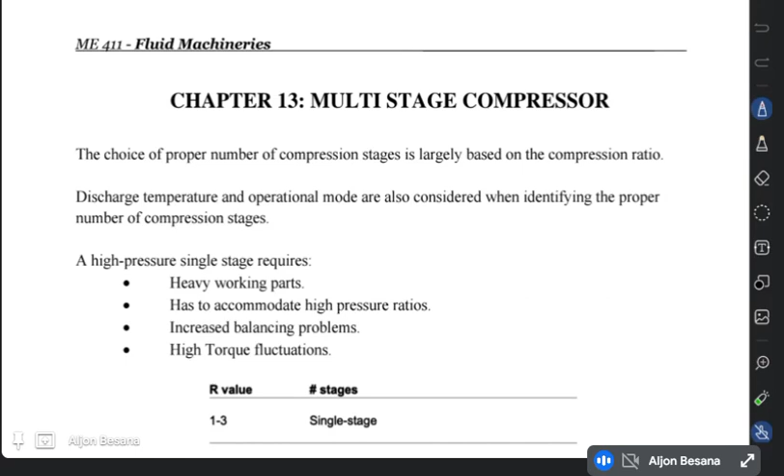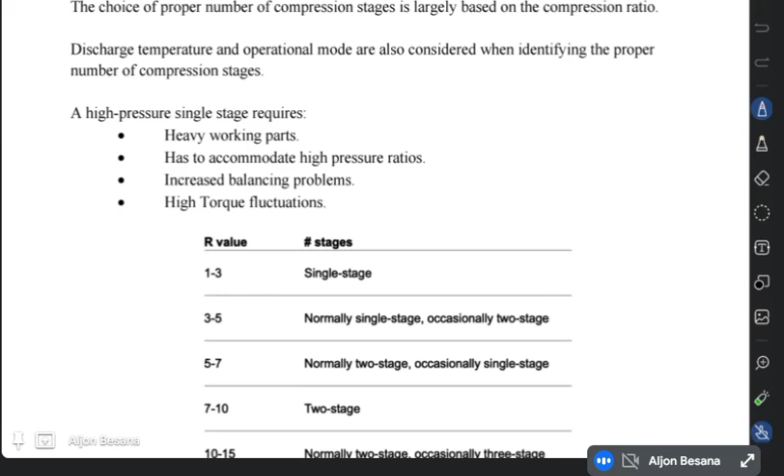Choosing the right compressor depends on what we need or how we are going to use it. The choice of proper number of compression stages is largely based on the compression ratio. Discharge temperature and operational mode are also considered when identifying the proper number of compression stages. A high pressure single stage requires heavy working parts, has to accommodate high pressure ratios, and causes increased balancing problems and high torque fluctuations.

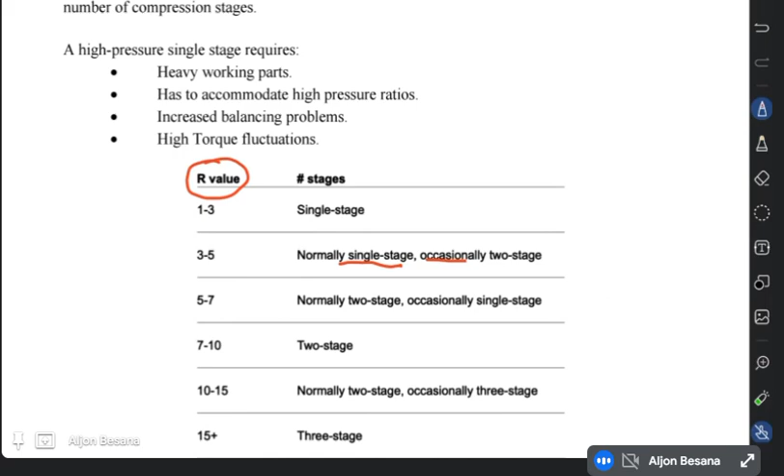This is our compression ratio, which is the value of R. When the compression ratio is 1 to 3, we could use a single stage. If it is around 3 to 5, it's still normally single stage, but we could also accommodate it with two stage. If the compression ratio is around 5 to 7, it will normally be two stage and occasionally single stage. Most of the time, that is already two stage for 5 to 7.

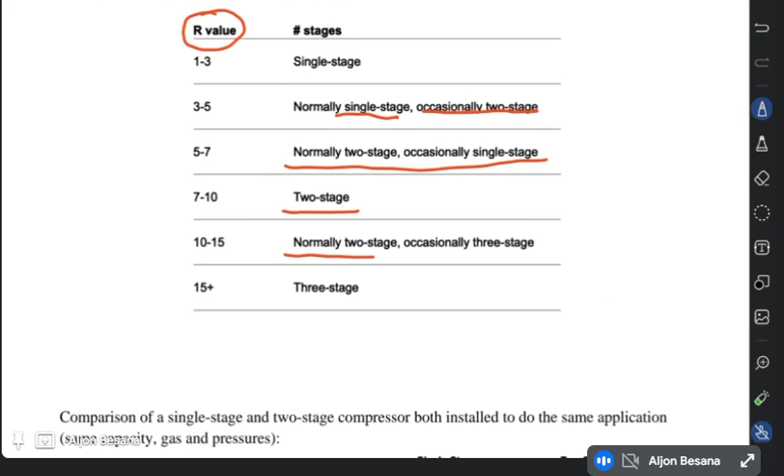We also have 7 to 10, which is already two stage compressor. For 10 to 15, it is normally two stage and sometimes it could be used with three stage. And if 15 and up, it would be three stage.

For the comparison of a single stage and two-stage compressor, both installed to the same application, same capacity, gas, and pressure, I have a video to be sent later showing the comparison between the single stage process or principle and the multi-stage principle.

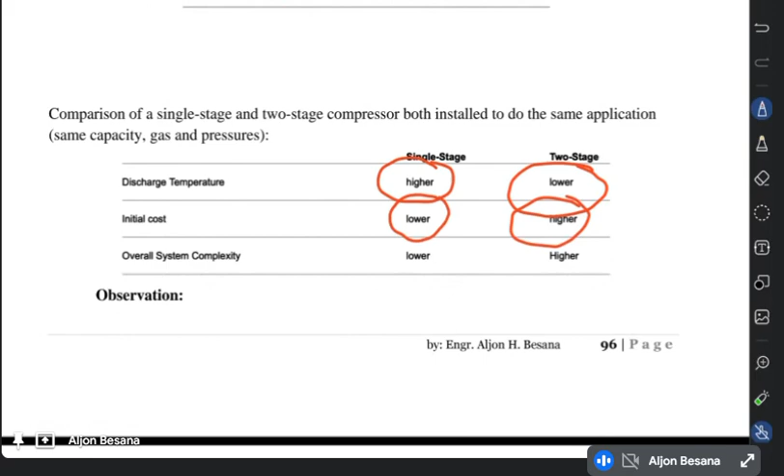For the discharge temperature, a single stage has a higher discharge temperature because as the fluid enters after a single process, it goes out. Unlike with two stage, we have a lower discharge temperature because we maximize all the possible energy we could harness before we release the gas. For the initial cost, single stage is lower and two-stage is higher because it requires more equipment. For overall system complexity, single stage is lower while two stage is higher.

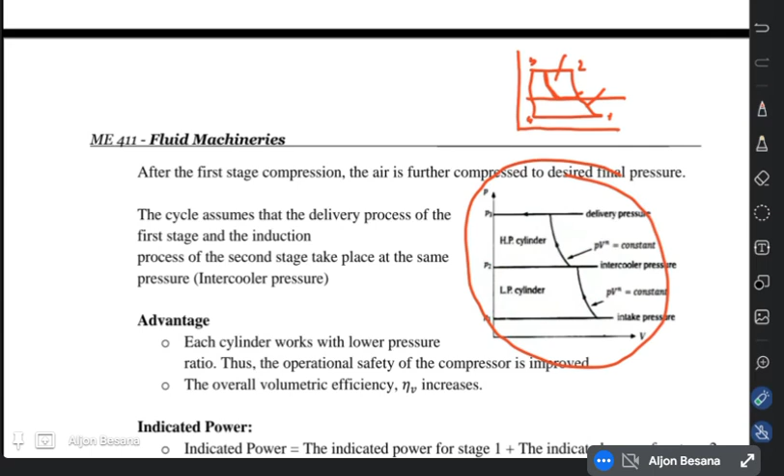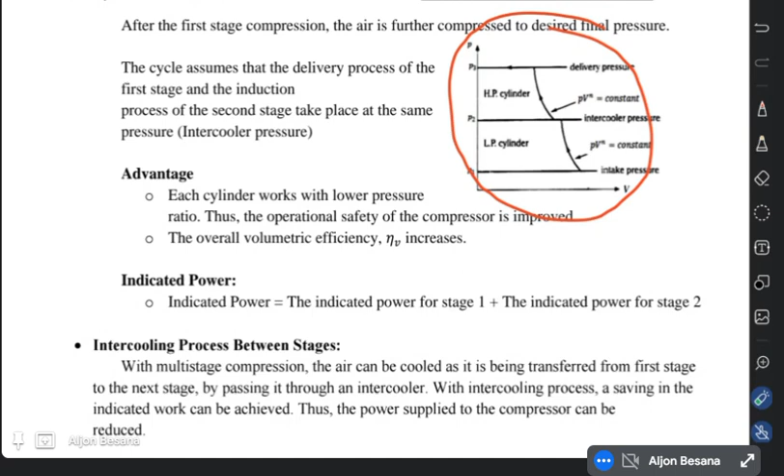So each cylinder works with a lower pressure ratio. Thus, the operational safety of the compressor is improved, because it's not forced to compress too much, making it safer in terms of safety. The overall volumetric efficiency, of course, increases.

For the indicated power of stage one and stage two, the indicated power for two stage is simply the indicated power of the first stage plus the indicated power of the second stage. So you just add the two.

For the intercooling process between the stages, with multi-stage compression, the air can be cooled as it is transferred from one stage to the next stage by passing it through the intercooler. With the intercooling process, a saving in the indicated work can be achieved, thus the power supply to the compressor can be reduced.

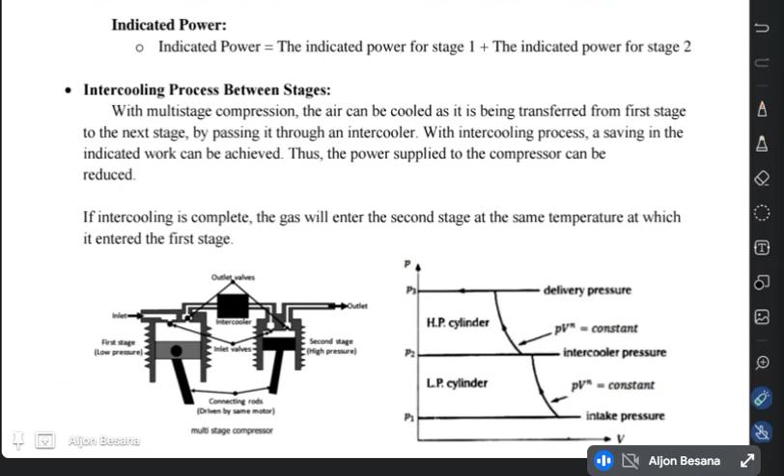If the intercooling is complete, the gas will enter the second stage at the same temperature at which it entered the first stage.

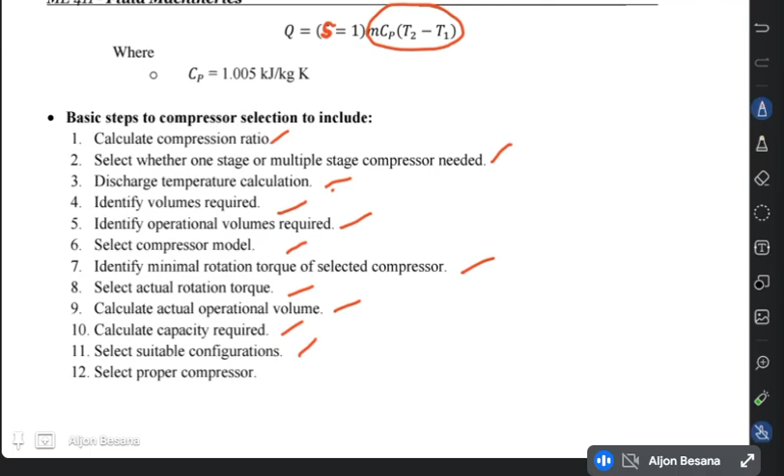For us to better appreciate this, let's try solving problem number 26 up to the last problem. A four-cylinder double-acting compressor is required to compress 30 meter cube per minute of air at 1 bar and 27 degrees Celsius to a pressure of 16 bar.

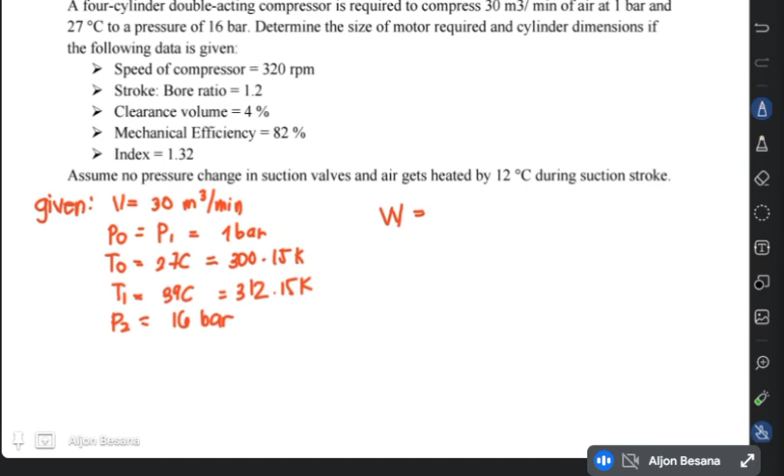Work is equal to polytropic index n minus 1, P1 V1 multiply to P2 over P1 raised to n minus 1 over n, minus 1. And this is our formula.

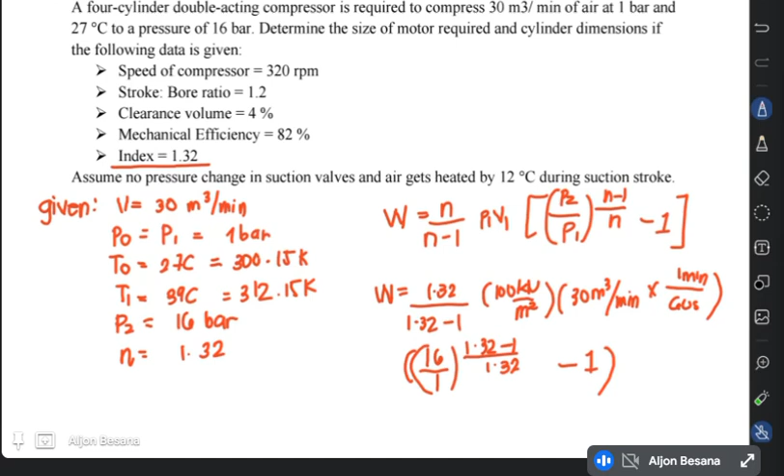So our result would be equal to, let's just calculate. Our answer is 197.6760214 kilowatts, and this is our work.

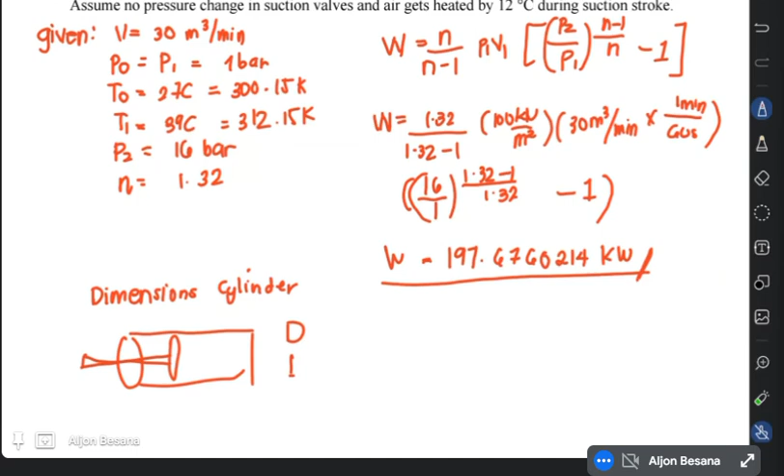So we could use this, or we could obtain D and L through our VD. Remember, our VD is LAN, where LAN is equal to L pi over 4, D squared N.

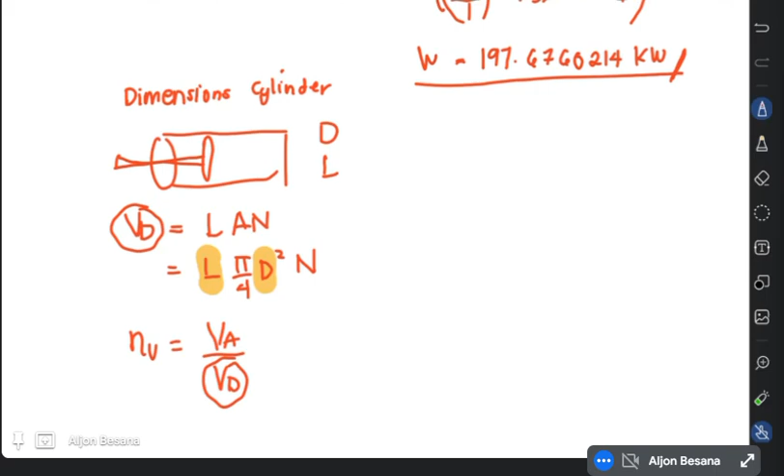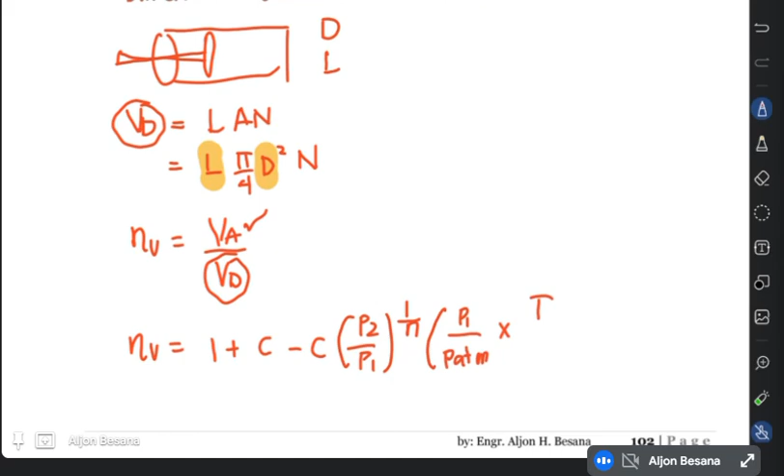NV is equal to 1 plus C minus C, P2 over P1 raised to 1 over N, times P1 over P atmosphere, times temperature atmosphere over T1.

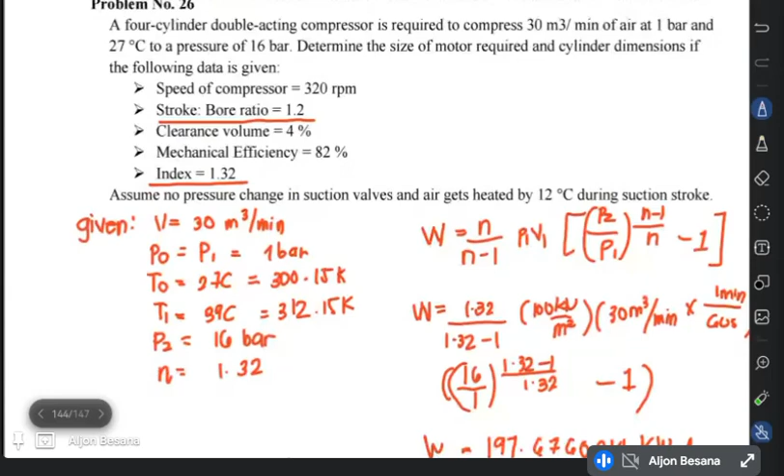To solve for our NV, para magamit natin makakuha tayo ng VD, NV is equal to 1 plus, ano ba yung clearance na binigay? May binigay na clearance na 4%. So, 1 plus

0.04 minus 0.04 times 16 all over 1 raised to 1 over 1.32, times... kahit wala na pala ito sa formula, no? Kasi parang siya ay for conversion lang. Ito agad tayong TATM, so times temperature atmospheric over T1.

Ano yung temperature atmospheric natin? Temperature atmospheric is our temperature of the air, which is 27 degrees Celsius. Dito sa atin, 27 plus 273.15... sorry, 300.15 Kelvin all over yung 312 Kelvin.

So our NV is equal to, ayan, so our answer is equal to 0.725770389, and this is our volumetric efficiency.

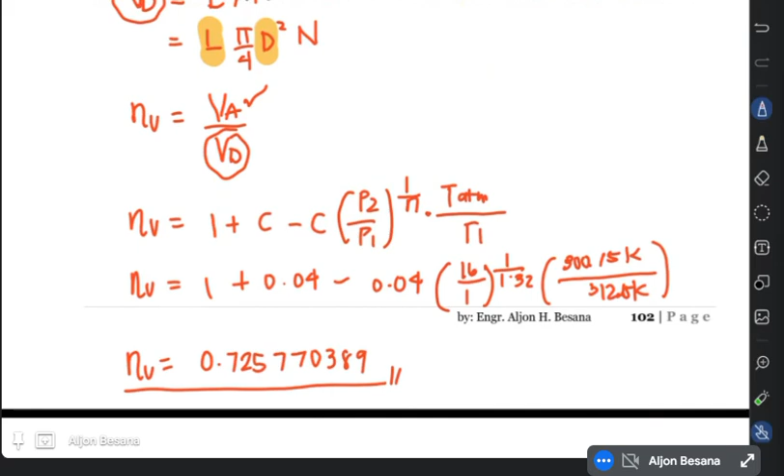0.725770389 is equal to VA over VD, na equal po kay 30 meter cube per minute over VD. So, makuha na natin si ating VD. VD is equal to 30 divided by 0.725770389.

Makakuha tayo ng ating VD na around 41.3353871 meter cube in every minute po. No? So meron na tayong VD.

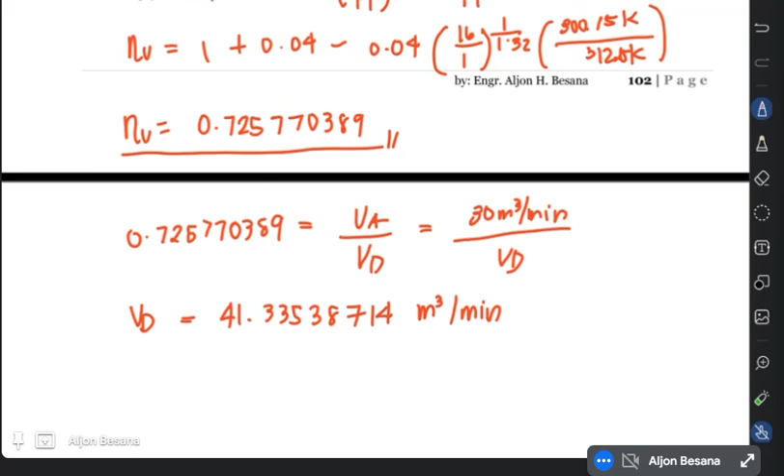Kung meron na tayong VD, pwede na natin siyang gamitin dito sa ating formulang ito para makuha natin yung D at yung ating L, no? So gamitin na natin siya sa formulang yun. So,

41.3353871 meter cube in every minute is equal to L times pi D squared all over 4, times N na 320 RPM. 320 RPM. Ang sabi sa atin, meron daw po tayo relationship ng ating stroke to bore ratio.

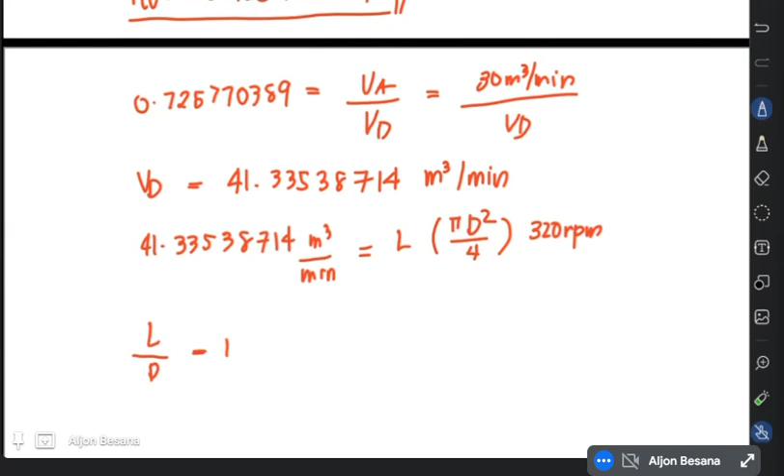No? So, stroke to bore ratio daw natin is stroke. Stroke natin is L to D ratio is equal to 1.2. So, L is equal to 1.2 bore or 1.2 ng diameter. So, substitute natin dun sa L.

So, we have equal to 1.2 D times pi D squared over 4 times 320 RPM. So, what will be the value of our diameter? So diameter will be around equal. Pero, huwag niyong kakalimutan na may binanggit din po sa ating problem.

The problem is four-cylinder, double acting compressor. So sa formula natin ng VD, we should also include that this one is four-cylinder and double acting. So we have times 4 and times 2. No? So let's solve for the value of the D.

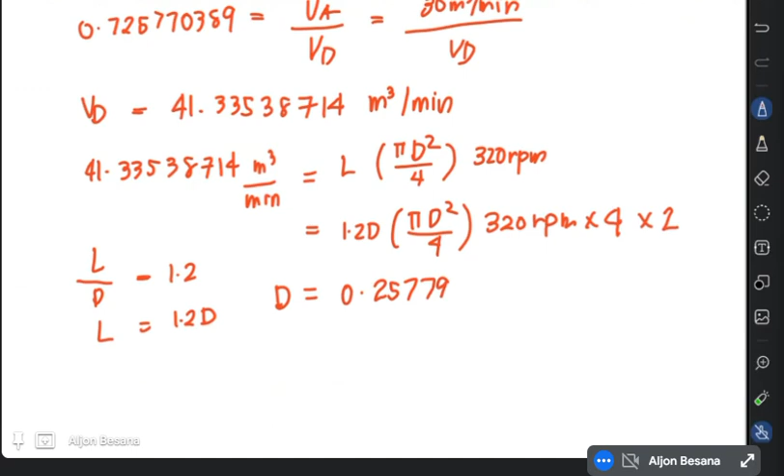So for this one, our diameter is 0.2577925163 meters po. Tapos, ang D daw po is 1.2. So ang L is 1.2 times D lang natin. Equal naman po si L sa, I'm sorry, 0.3093510195 meters po. So, we are already done.

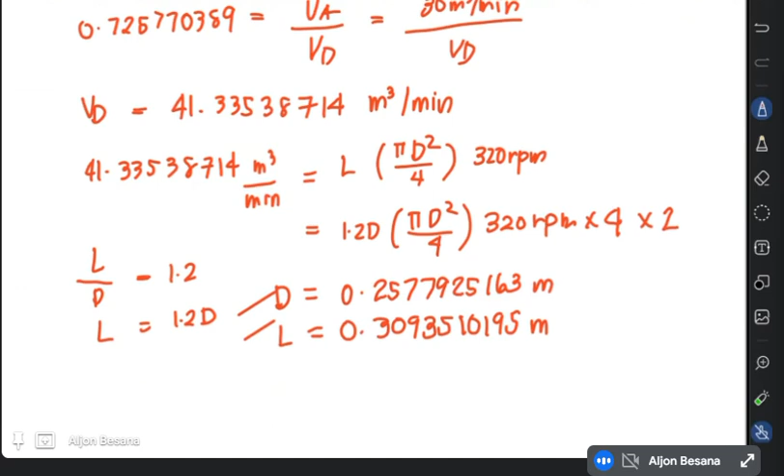Nakuha na natin ang dimension at nakuha na rin natin ang work or yung kailangang power ng ating compressor. So, let's have problem number

27. So for problem number 27, it is desired to compress 16 meter cube of air per minute from 1 bar and 294 Kelvin to 10.5 bar or simply 1.05 megapascal. So calculate the minimum power required to drive the compressor with the two-stage compression and compare it with

the power required for single-stage compression. The maximum temperature in two cases, the heat to be removed in the intercooler per minute, the amount of cooling water required per minute if the inlet and outlet temperature of the cooling water to and from the intercooler are 15 degrees Celsius and 40 degrees Celsius.

Yan, 15 lang to, 15 and 40 degrees po. Assume the value of index for compression process will be 1.35, so may N tayo. Also, assume proper intercooler pressure for minimum work and perfect intercooling. Take R is equal to 0.287, Cp is 1.0035 kilojoule per kilogram Kelvin of air.

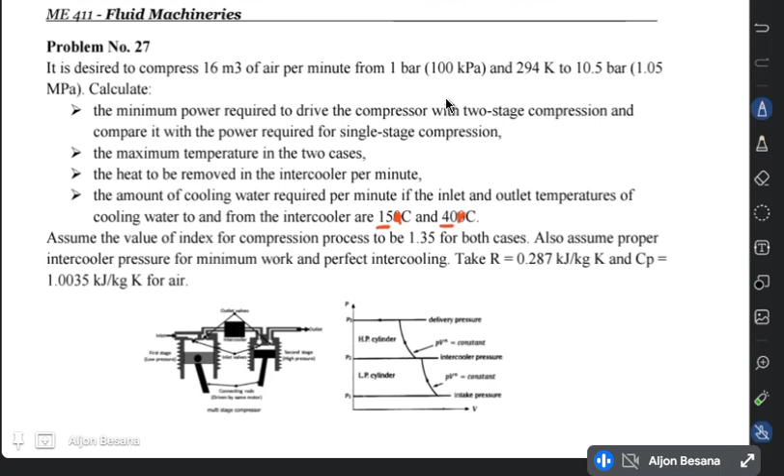So if you could see here, so yan. So ito yung ating meron tayong two-stage compressor. No, so with our two-stage compressor, ayan. So let's

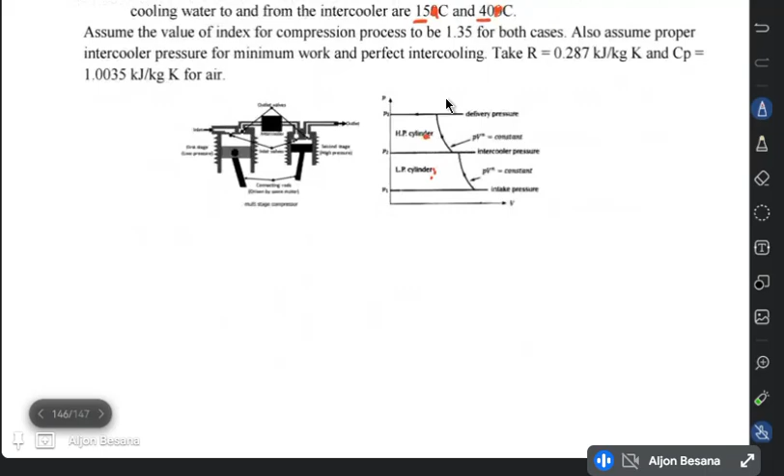ang hinahanap sa atin ay ano una? The minimum power. Doon muna tayo sa given pala, sorry. So let's sub the given.

So P1 is equal to 1 bar. T1 is equal to 294 Kelvin with our polytropic index N equal to 1.35. Our V1 equal to 16 meter cube per minute.

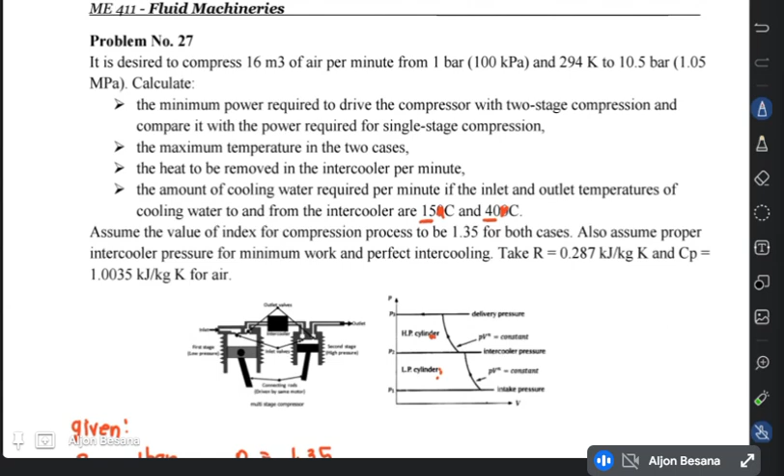So sa ating problem, yung P3 natin desired ay 16 meter... desired to compress 1 bar to 10.5 bar. So yung ating P3 is equal to 10.5 bar. Bakit po P3 final? Pwede ring PF. No, kasi P1, P2, P3, tatlo. No, pwede ring PF.

Then we have our R na equals 0.287 kilojoule per kilogram Kelvin. Our CP naman equal sa 1.0035 kilojoule per kilogram Kelvin of air. So meron po tayong temperature inlet na 15 degrees Celsius at T outlet po na 40 degrees Celsius.

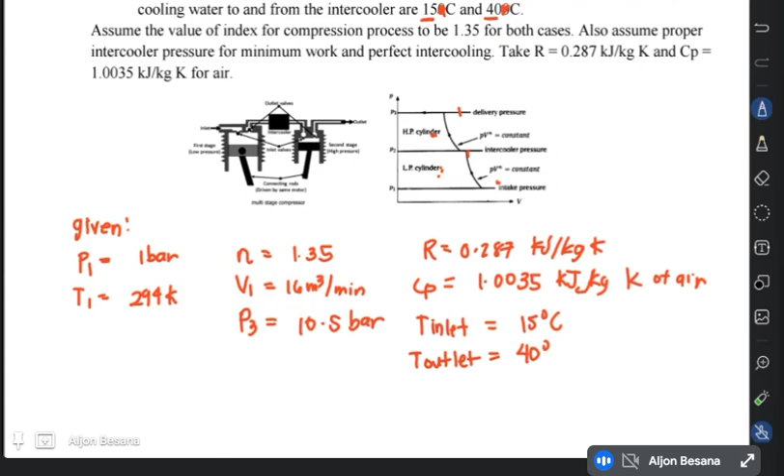Okay, so let's first have for us two-stage compressor. Dahil two-stage, stage 1 is stage 2, so this is two-stage po. So for this two-stage, ang formula natin, general formula na lang tayo para hindi tayo nalilito. So for this two-stage, work is equal to S n over n minus 1, P1 V1 raised to Px over P1 raised to n minus 1 over S n minus 1. Where, kapag two-stage, magiging yung S natin ay magiging 2. Yan, that is for the two-stage compressor.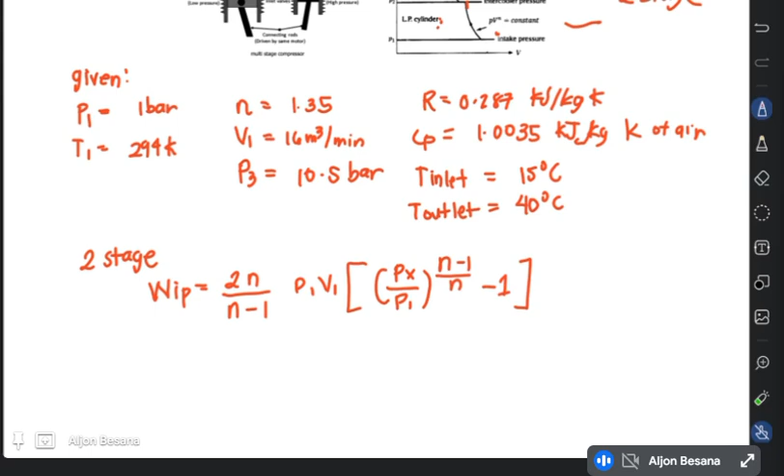So let's try to solve. Given naman tayo na lahat ng pangangailangan natin. So 2 times 1.35 all over 1.35 minus 1 times our 100 kilonewton in every meter squared, with our velocity, volume flow rate, which is times 16 meter cube in every minute, given din to. Convert lang natin in every minute ay 60 seconds, times yung px natin. Binigay po ba ang px natin? So si px natin ay wala pa.

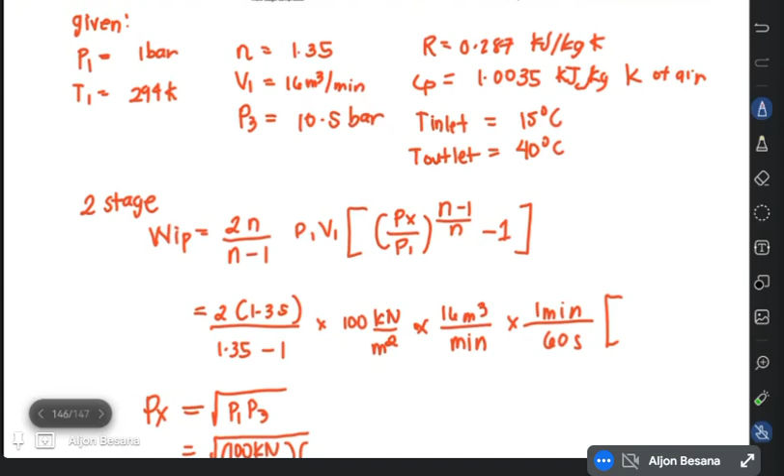So let's try solving our px. Paano po ba ang formula ng px pag two-stage? Px is equal to square root ng P1, P3. So square root po ng ano ang P1 natin? P1 is equal to 100 kilonewton times P3 is 10.5 bar, which 10.5 bar is equal to ilang megapascal yun? 1.05 megapascal. So this will be around, in terms na agad tayo ng bar para madali, 3.241 bar.

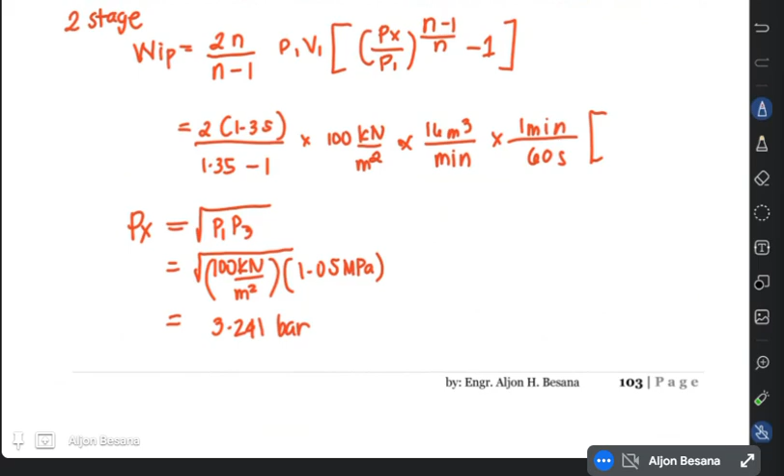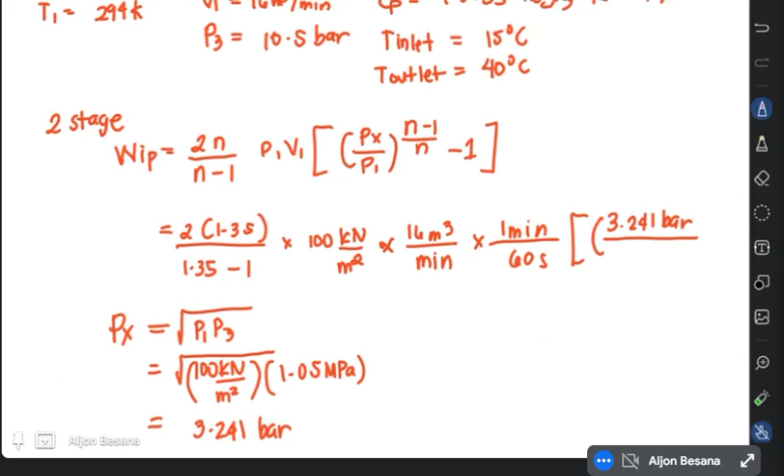No, so you may try to compute, same naman. So we will now be having 3.241 bar all over yung ating P1 na 100 kilonewton are also equal to 1 bar. Kaya bar ang ginamit ko para madali yung cancellation dito, madali sa calcu. Raised to 1.35 minus 1 over 1.35, may minus 1 pa dito. Okay, so our WIP is equal to, so this will be equal to 73.32330881 kilowatts, ay, watts. So meron na tayong work input.

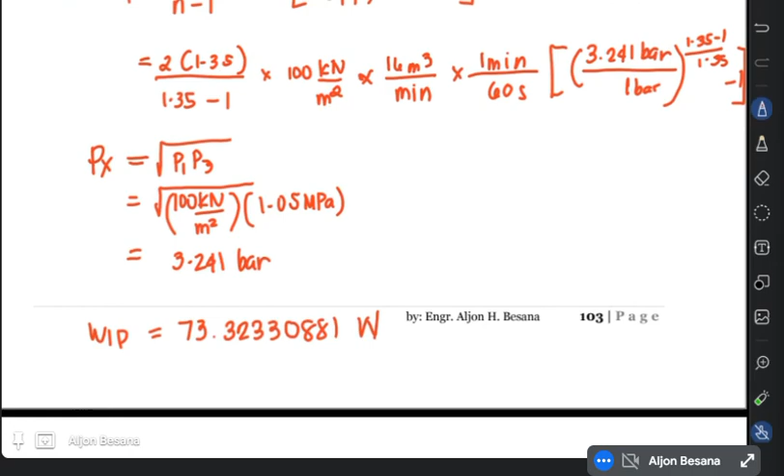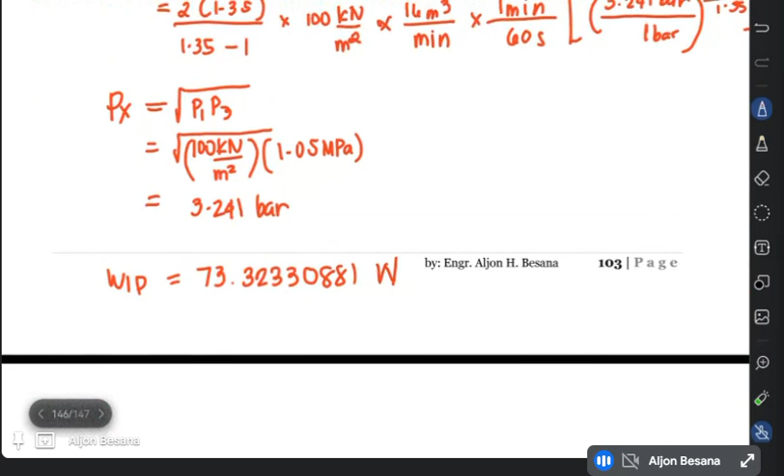Sunod, ano bang hinahanap sa ating sunod? Minimum power required, done. Maximum temperature. So maximum temperature natin, pag maximum temperature, then that is T3. So T3 is equal to, naalala niyo yung formula, nakalagay na dun kanina sa atin, N minus 1 all over N. So this will be T3 is equal to, anong T1 natin? T1 is equal to 294 Kelvin. P3 is equal to 1.05, 10.5 bars, while Px is 3.241 bar raised to 1.35 minus 1 over 1.35. Our T3 is equal to 398.7510543 Kelvin po.

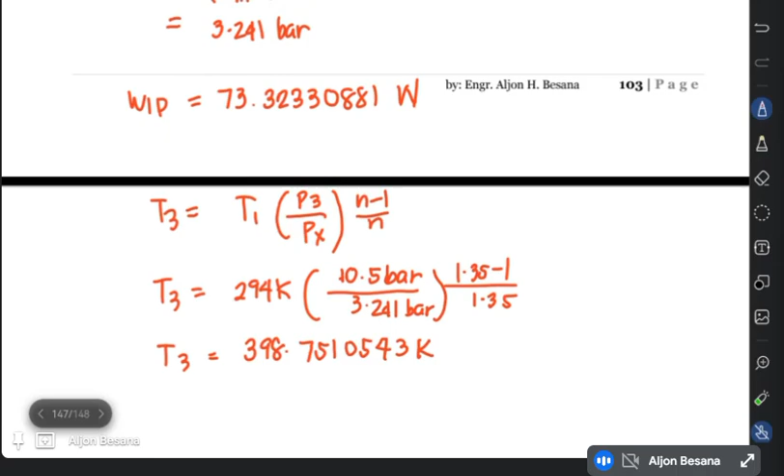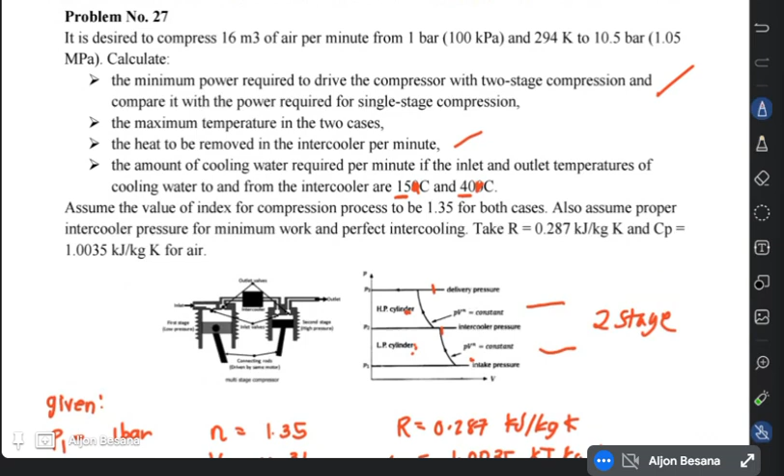Okay, ano yung sunod na tanong na hinihingi? So meron na tayong work, meron na tayong highest temperature. Ang hinihingi, the heat to be removed in the intercooler per minute. What is the heat to be removed in the intercooler per minute po? So the heat to be removed, ay wait lang. Bago tayo mag-heat to be removed, ang nakuha pa lang natin ay for the two-stage compression. No, ngayon kailangan din daw natin ng single stage compression.

So kunin din natin, oo marami tayong time. Kunin din natin for single stage compressor. So pag single stage, ang formula natin ng work is equal to K over K minus 1 times P1 V1 raised to P2. I'm sorry sa K, nasanay ako sa K. So N. Yan, P1 V1, P2 over P1 raised to n minus 1 all over n minus 1. Mawawala lang tayo ng ating px, yun lang naman yung nawala.

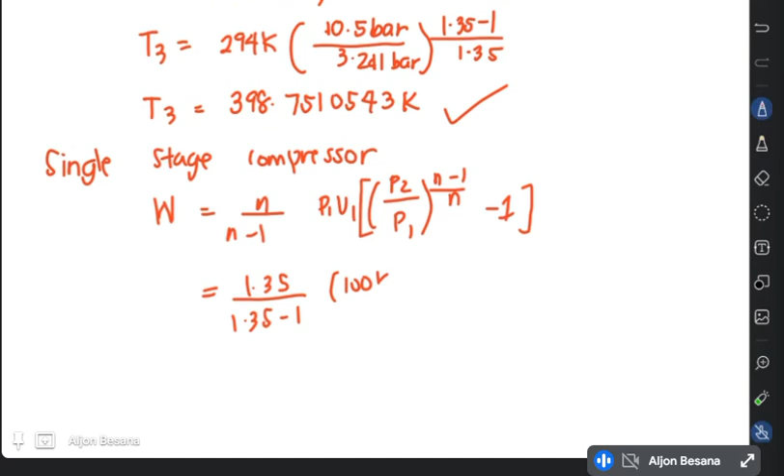Pagdating dito, so we have 1.35 over 1.35 minus 1 times 100 kilonewton in every meter squared times 16 meter cube in every minute, times in every 1 minute over 60 seconds, times 10.5 bar, hindi na px, p2 na ginamit natin, over 1 bar, raised to 1.35 minus 1 over 1.35 minus 1 sa baba.

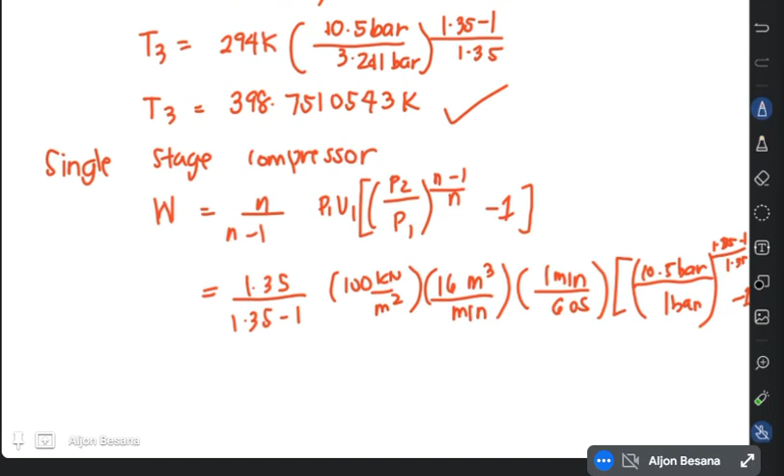So we will be able to obtain 86.37165818 watts po.

So kung i-compare natin, mas mataas ang konsumo pag single stage in comparison with our multi or two-stage compressor. Kapag single stage, yung ating makukuhang temperature T2 is equal to T1 times P2 over P1 raised to n minus 1 all over n, then it is around 540.87 something Kelvin po.

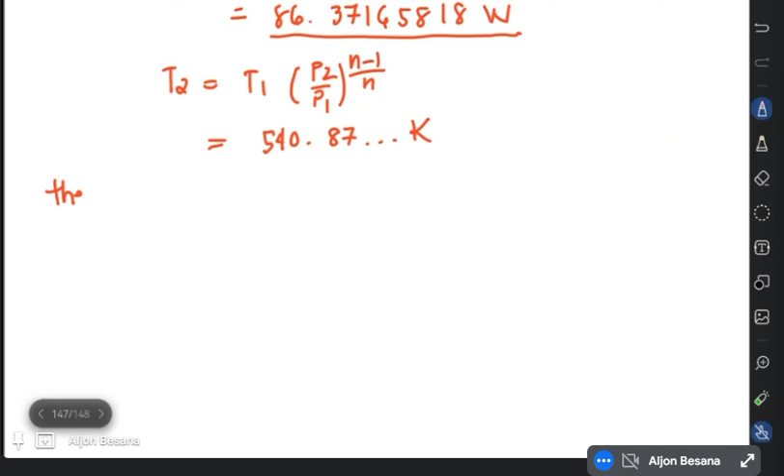So mas mataas din ang temperature na ilalabas pag single stage. So let's look for the heat to be removed in the intercooler. Heat is equal to the formula S minus 1, M CP, T2 minus T1.

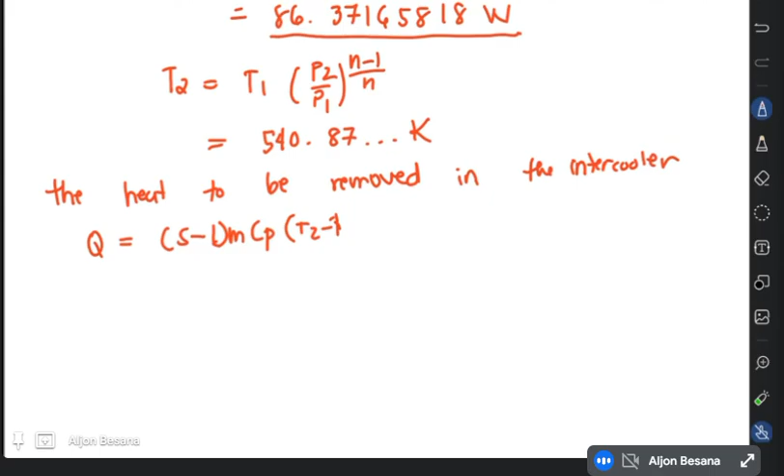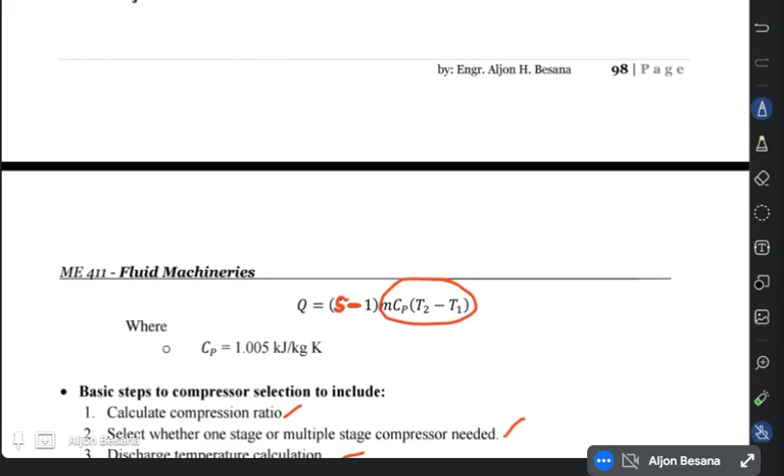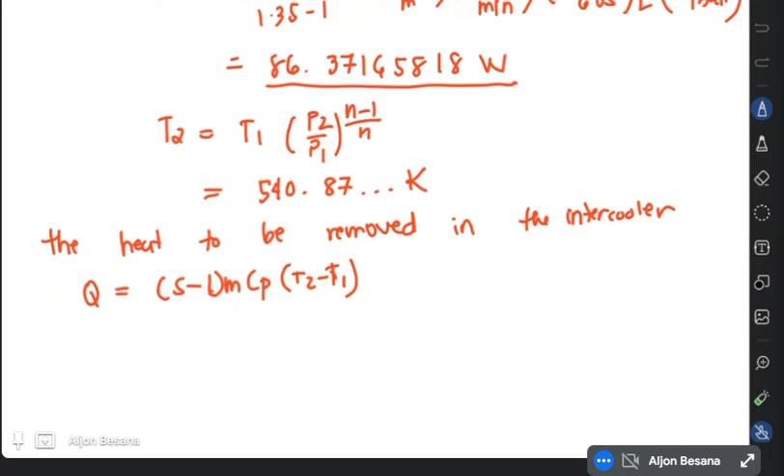I-correct na natin, I'm sorry kanina. So this is not equal, that is S minus 1. Pakorek ako po. Kung pinanood mo ang video na to, makikita mo yung correction natin dito. Ito po ay S minus 1, MCP, T2 minus T1. So given na tayo with our S, which is the number of stages, at ang CP na binigay sa atin is equal to 1.0035.

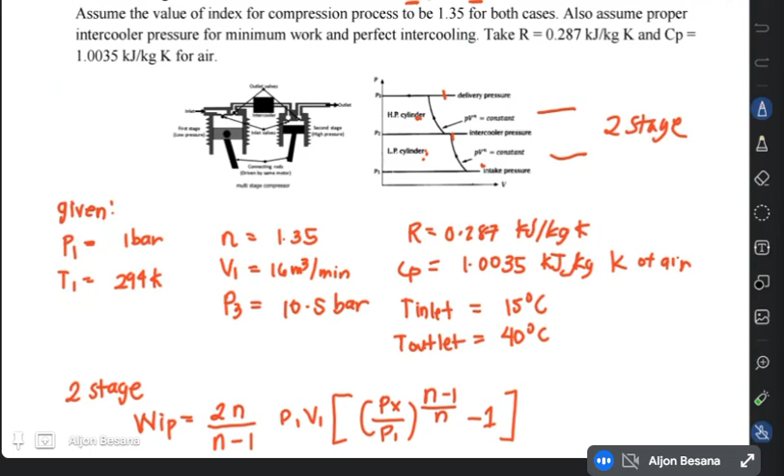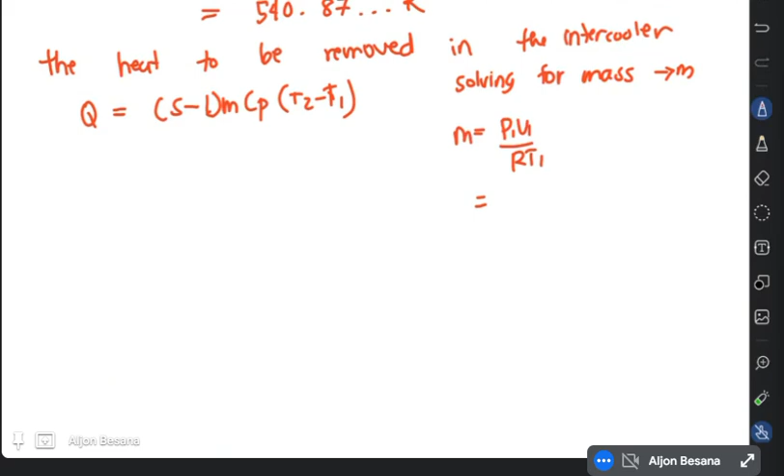Ang mass natin, kukuhanin pa natin si mass. Let's solve first for our mass kasi wala pa tayong mass. So for us to obtain this, solving for mass M is simply equal to P1 V1 over R T1. Ano po yung P1 natin? P1 is equal to 100 kilo Pascal or 1 bar.

Tama ka nga, 1 bar, kilonewton per meter squared or kilopascal. Then V1 natin is equal to, ano value ni V1? 16 meter cube in every minute, times in every 1 minute ay meron tayong 60 seconds, times 0.287 kilojoule per kilogram Kelvin, times temperature 1 natin na equal po kay 294 Kelvin.

So solving for our mass, it will be equal to 0.31603881458 kilogram in every second po. So let's substitute na: S minus 1, simply 1, times M natin is 0.31603881458 kilogram per second, times yung ating CP na 1.0035 kilojoule in every kilogram Kelvin, times 398.75.

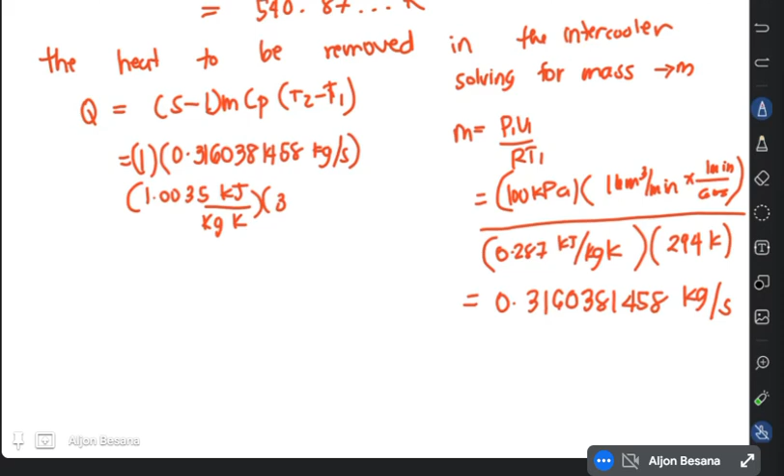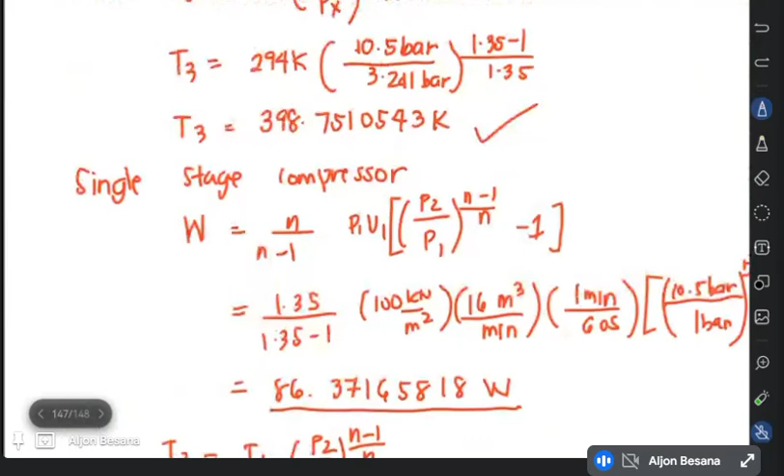Kukuhanin pa rin pala natin to, hanapin natin yung T2 natin. Di ba nakuha natin ata to kanina? Hindi, ang kinuha natin kanina is T3 for 2 stage, pero hindi natin kinuha ang T2 for 2 stage. So for us to obtain T2, iba ang T2 ng single stage, iba ang T2 kapag 2 stage.

T2 of 2 stage, may formula tayo: T2 is equal to T1 times PX over P1 raised to n minus 1 all over n. Ibig sabihin siya ay multi-stage. Ang T1 natin is 294 Kelvin. PX natin, anong value ng PX natin kanina? 3.241 bar over 1 bar raised to n natin is 1.35.

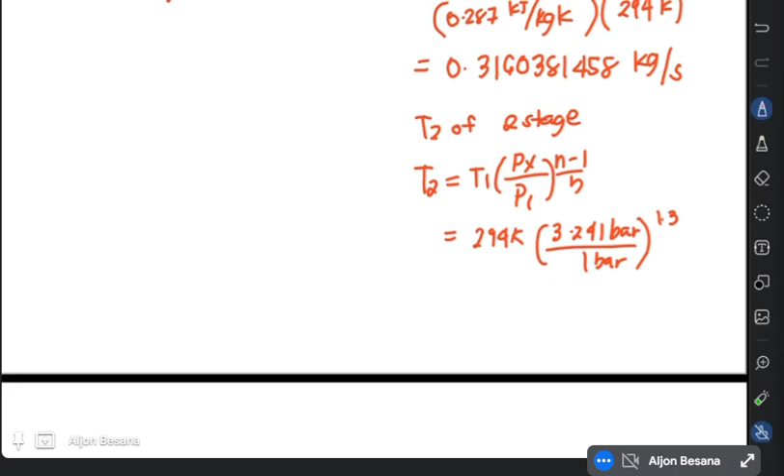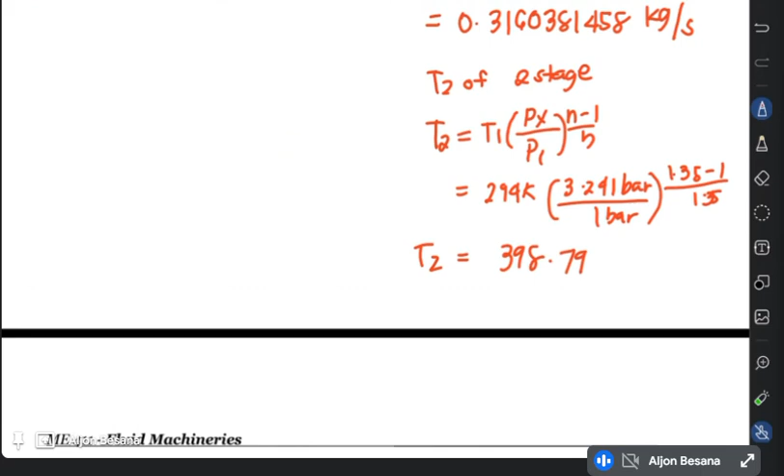1.35 minus 1 over 1.35. So T2 is equal to 398.7912288 Kelvin. So pwede na natin siyang magamit dito. 398.7912288 Kelvin minus yung T1 natin na 294 Kelvin po. So our heat is equal to

33.23393875, this is already in kilowatts. Kasi naka-kilojoule tayo, kaya siya ay kilowatts po. Ano pang hinahanap sa atin? Okay na tayo sa heat rejected. The amount of cooling water required.

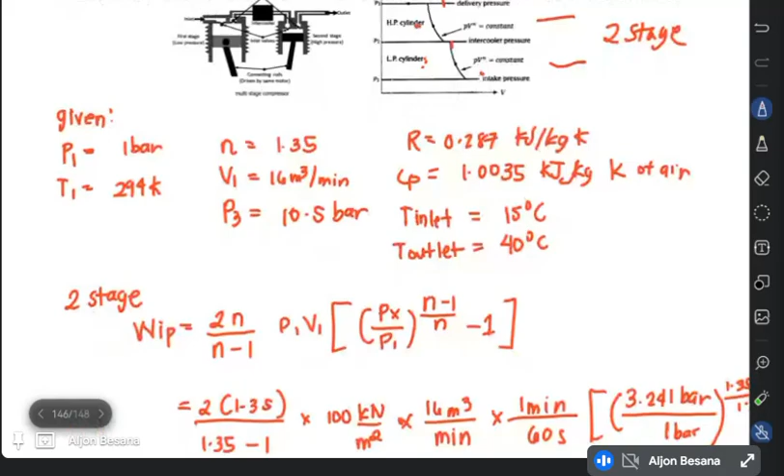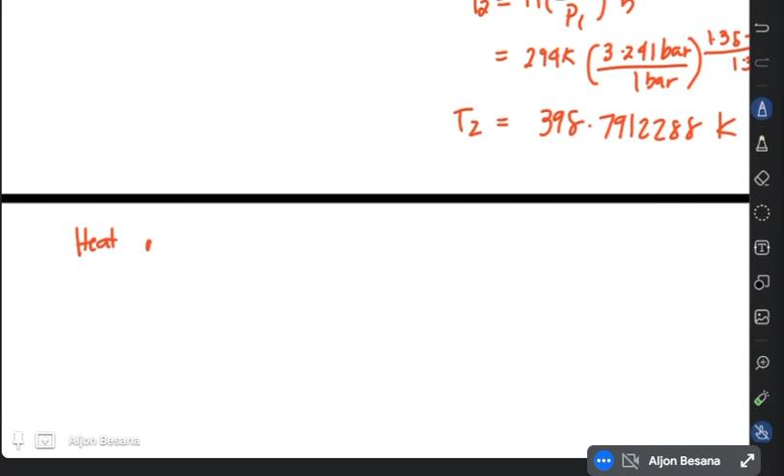Ang dami namang hinihingi nito, nakaka-tired. So the amount of cooling water required, so for us to identify, we could say that heat rejected by air in every minute is equal to heat gained by cooling water per minute. Kung ano yung atin pong inilabas, yun din po yung i-absorb ng ating cooling water. So we could say that heat na nakuha natin kanina is simply equal to mass ng water, CP ng water, T2 minus T1. Simple heat formula, is equal to MCP delta T natin.

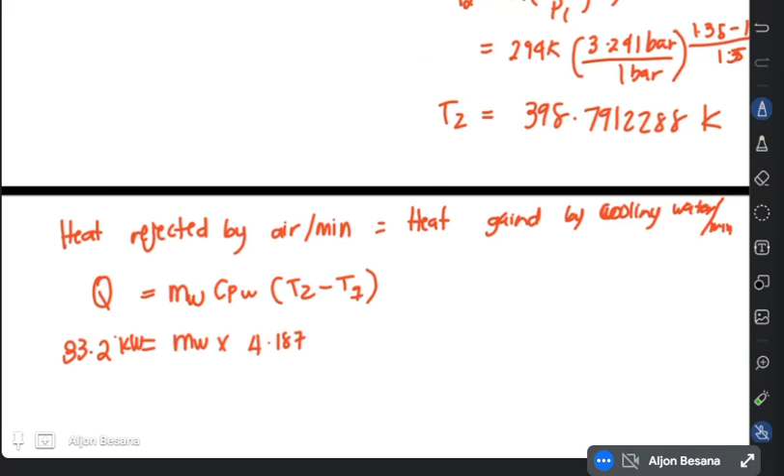So ano nga yung nakuha natin kanina? 33.2 kilowatts is equal to mass ng water, ito yung hinahanap natin, times anong CP ng water? That is 4.187 kilojoule per kilogram Kelvin. Ang T natin, binigay yung cooling water, T inlet at T outlet for the cooling water. So that is 40 minus 15.

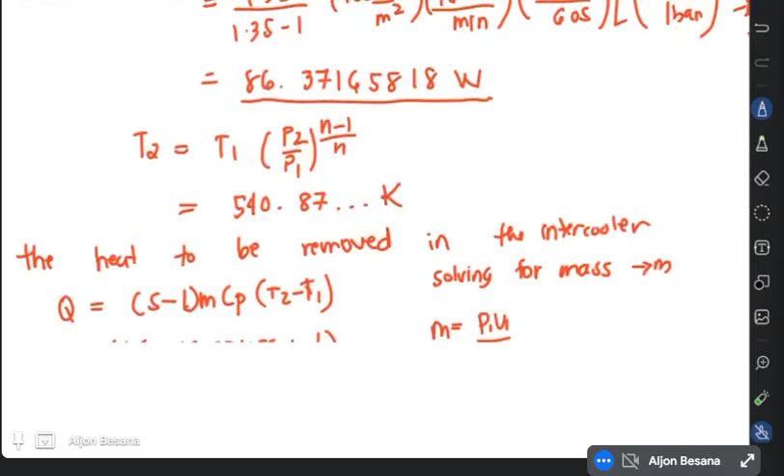So we will be having 0.3174964294 kilogram in every second. And that is our problem number 4.